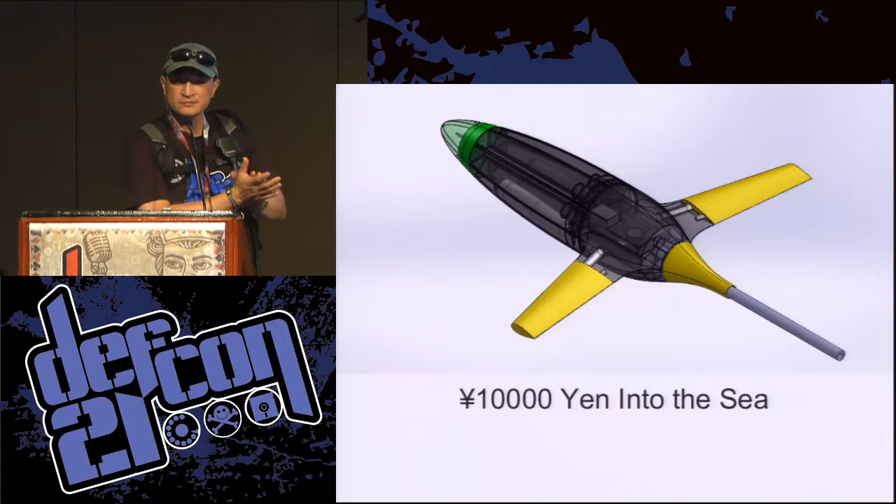Hello. So, as he said, I'm Flipper. This is my talk, 10,000 yen into the sea. Just to start with, can I get a show of hands? Who enjoys filling up their gas tank? Yeah, I'm not a big fan of it either.

Actually, I spent 4 years commuting to and from my community college. 4 years, 2-year program. I had other things to do. So it was a 45-minute drive each way, so I pretty much ended up putting about as much money into my tank as I saved by living in my parents' basement. So all the benefits of living in my parents' basement with none of the cost savings. So that was kind of an interesting experience.

And the reason why this is relevant is shortly after college, I saw underwater gliders, and they kind of blew me away because when you see the typical range and duration of these things' missions, it's pretty incredible. Around 3,000 kilometers on a single battery pack charge.

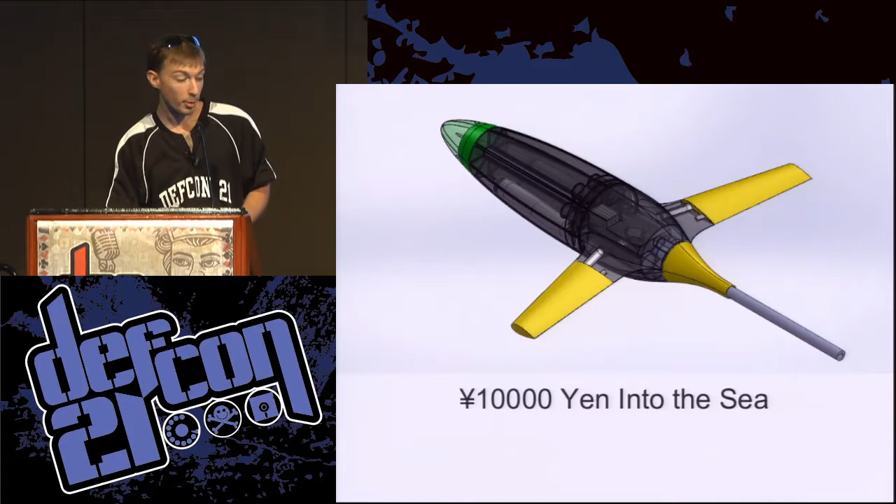And I work with electric vehicles professionally, partially as a consequence of this project. And I got to say, if you can show me a Nissan Leaf that can go 3,000 kilometers, I'll be pretty impressed. One of my coworkers says it's all about the drive cycle.

So, as I said, I'm Flipper, and this is kind of what I do, electric vehicles. Professionally, they're ground vehicles here, underwater. I keep on trying to talk my boss into letting me turn one of our vehicles into a submarine, but so far, no such luck.

So, I'm finished with my education and not much in the way of job options at the time, kind of dead-end jobs, and I'm killing time in the bathroom because I didn't really like my job. Reading the Oregonian, and I see an article on Oregon State University's underwater glider program. And they were talking about how they work. They show a little cutaway diagram, and I'm kind of blown away.

It's all like, wait. How much do these cost? I could do that. $100 tops. So that's where the 10,000 yen comes from, is at one point in history, that was about $100. A little bit of Jules Verne's too. So in order to build an underwater glider for $100, you kind of have to be an engineer, or hacker, one of the two. I definitely wasn't an engineer, so I guess that's why I'm here at DEFCON with you guys.

So how do you design an underwater glider? You have to learn how to design an underwater glider. So it was really the start of an education, self-taught in design and manufacture of underwater vehicles. I was studying machine tool technology at the time, manufacturing engineering type stuff, eventually got a transfer degree. And so yeah, it was a great vehicle to actually learn, and it gave a really good incentive to study STEM subject matter, and ultimately transitioned into an interest in an engineering transfer degree.

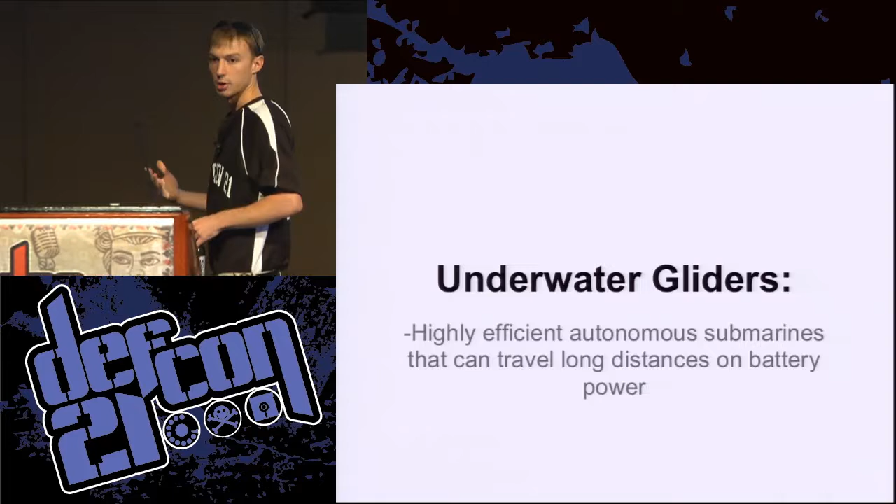And so the efficiency of the vehicle is going to be determined by a couple things. First of all, the efficiency of your fish bladder buoyancy engine. Your drag, big factor is your drag. And then also kind of related to drag is your glide ratio: how many feet forward you move through the water for every foot you lose or gain in altitude.

One interesting thing of underwater vehicles is they spend about half the time flying upside down because your gravity vector flips its head when you are going against the water column or going down with it. So, yeah, they're autonomous underwater vehicles that can travel long distances on battery power.

So history, it all started back in the 80s or something. I wasn't even born yet, so it doesn't really matter. Very egocentric view of the universe.

So they had these things called Argo floats, and they were essentially a coffee can with a big linear motor powered syringe, and they'd go down through the water column and they'd collect sensor data. And then when they had enough data, they'd float back to the surface, satellite modem, phone home, and then they'd do it all over again.

And based on my understanding of how things went down, one person was like, well, these things are really cool. We're getting really good data. We're not having to send people out in boats at $40,000 a day. But the problem is we can't actually control where they go. They're kind of like hot air balloons. So it was like, what if we strap wings on them? And underwater gliders were born.

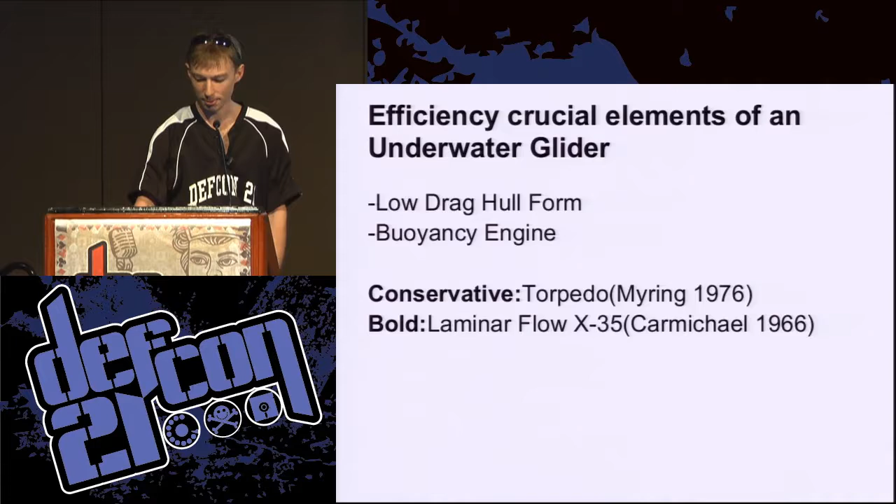So these were the design requirements I went into it with. I wanted the barriers to entry to be super low because even though I had access to a milling machine and a lathe, not everybody does. So I wanted all of you to be able to take your DEFCON CD, take the solid models that are on there, and go home and build one of these yourself.

And then range and efficiency: you're not going to take a two order of magnitude reduction in cost without taking some hits on range, efficiency, performance. So it was kind of a best effort basis. I'm pretty optimistic. I've got a fairly large battery pack compared to the current consumption I'm looking at. So we'll see.

This design actually served as a little bit of inspiration for a hack I had to make towards the end of this project. Overall, the check valves involved were kind of a prohibitive feature that just disillusioned me of this concept. So, considered a lot of things.

I struck out electric motors and linear actuators pretty early on in the process because, at the time, a lathe and milling machine were pretty much a requirement to make those happen. The weight of using an off-the-shelf linear actuator was pretty massive. You'd end up with like a scuba tank pressure housing, and that's no fun.

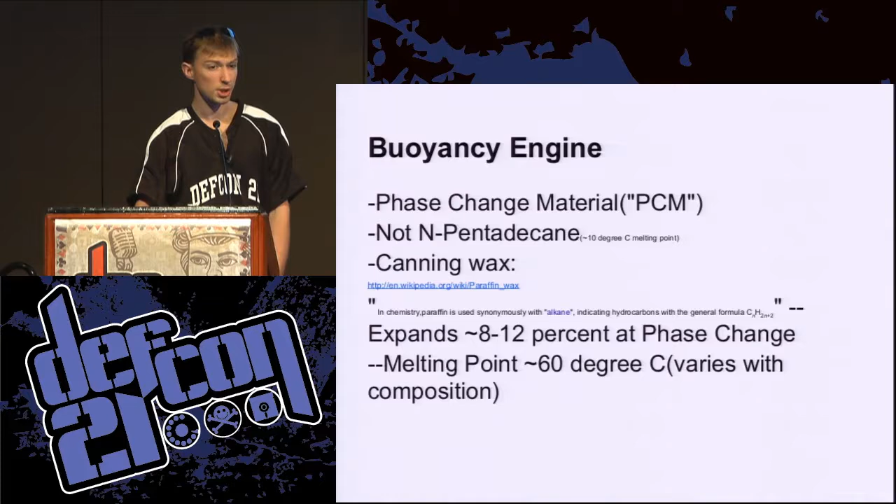So wave and solar power, interesting concepts. I'd like to explore them a little bit, especially for one concept I might mention at the end. But overall, hydraulic pumps and phase change materials kind of stood out to me as the best choices available. So paraffin wax expands 10% when it melts-ish, and it's got a very high specific heat. So when it does melt, it'll stay liquid for a very long time.

When I first started on this project, there really wasn't much available in the way of low-cost inertial navigation. You had the MultiWii project, which I thought was pretty genius. They took a Nunchuck and a Motion Plus from a Wii game console, and they actually made a 6-degree of freedom IMU out of it. Welcome to the future. This is really cool.

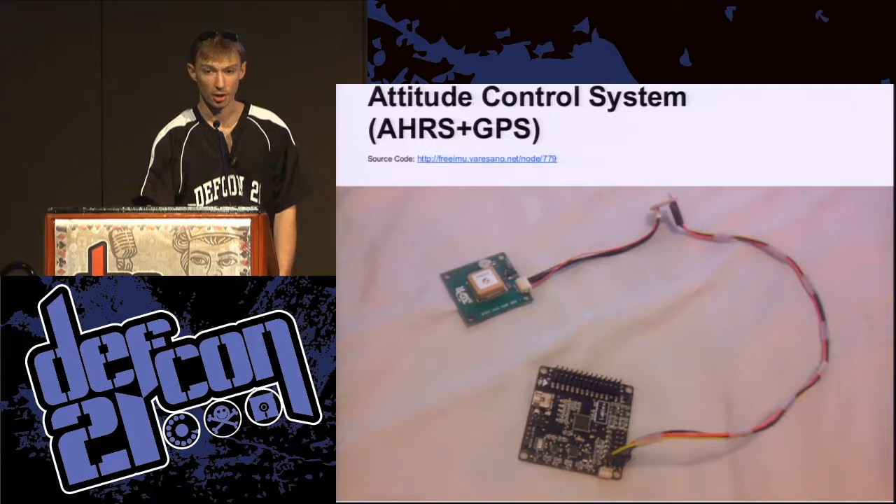Hull design was kind of fun. I spent most of the past year working on that specific aspect because it ultimately guided the production of the rest of the vehicle. Once I knew what I was packaging, I had to actually wrap it up into some sort of fluid dynamic hull form. And so based on the research, I'd heard some interesting things about 30-to-1 glide ratios with something called a McMaster's airfoil, which is pretty much a NACA 4-digit series 0030.

But based on the simulations I did using a program called Profili 2, marketed at RC plane design, its main claim to fame was it didn't stall out at high angles of attack, whereas the black line has one of the sharpest peaks on there. So NACA 0009 was kind of out of the question too. So kind of a middle of the road choice of the symmetric airfoils that were well understood at the time.

Pretty common options are NACA 0015-ish. So I think my wing root is NACA 0015 and wing tip is NACA 0012. And what that does, hopefully like the Rutan Long-EZ, if you end up stalling out, the wing root stalls before the wing tips, and that will cause the pitch to self-correct. Fingers crossed on that. Not a lot of testing in that regard.

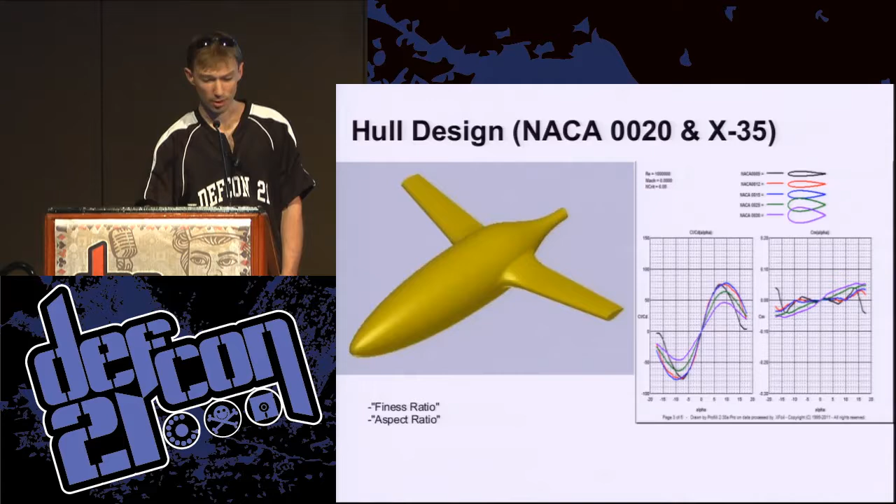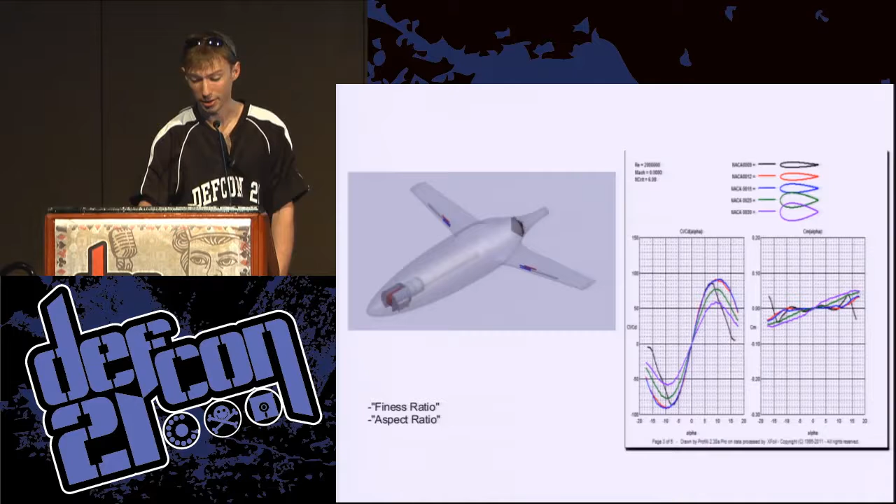So first concept, I took a polycarbonate tube and a wax motor used to control a dishwasher latch, funny enough. High force, high latency, low efficiency, unfortunately, as I found out later. And oh no, I'm not sure if I'd submitted my CFP at this point, but I was kind of sweating at that time because I'm apparently really, really bad at fiberglass.

Who knew? The original idea was that I would be using hot wire foam cutting techniques to actually generate the hull form and then lay fiberglass over it. And as you can see from this picture, that wasn't going so hot. So not as easy as it looked on YouTube. Was not going to hit my deadline at that rate.

So throw money at the problem. I've generally found that when time is of the essence, money can generally buy you time back. So I bought a 3D printer. I really am happy I made that decision. 3D printers are really cool. One of the design requirements, being able to build this thing in my underwear, check.

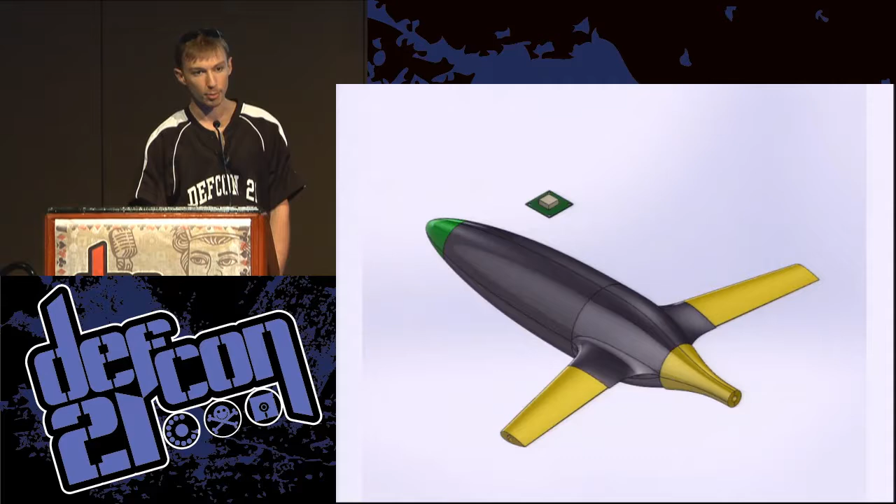So similar design, same hull form, but now broken into smaller chunks to help with the print volume, and also trying to minimize the overhang of the printed parts. Support material is an option, and one of the largest prints on there actually was using support material. But 1 month turnaround time, you really can't argue with that.

And I knew 3D printing could really help expedite the design process and getting you through multiple iterations. But until I'd experienced it firsthand, kind of saving my bacon on getting a proof of concept out the door and second, third revision, whatever, I was incredibly impressed with the value.

That 3D printer I showed was a Rostock Max. It's a Delta Bot style design, and they are one of the coolest to look at when they're running. Cartesian Bot's a little bit lame, in my opinion. And that's the robot you see in front of you.

So, $100 price target, $31 a kilogram for my plastic. That could be cheaper, but let's try and be generous just to make sure I don't underestimate. So $21 in plastic. So if you throw a significant amount of capital investment at the prospect of building injection molding tooling, then that could come down significantly. Remaining bill of material was actually published to the DVD, if I remember correctly.

And I mentioned there may have been some hiccups along the road. This bill of material is definitely not accurate to the 30-cent mark, because the phase change material concept ended up working out to not just moderately inefficient but virtually unworkable, at least with the energy storage system I selected.

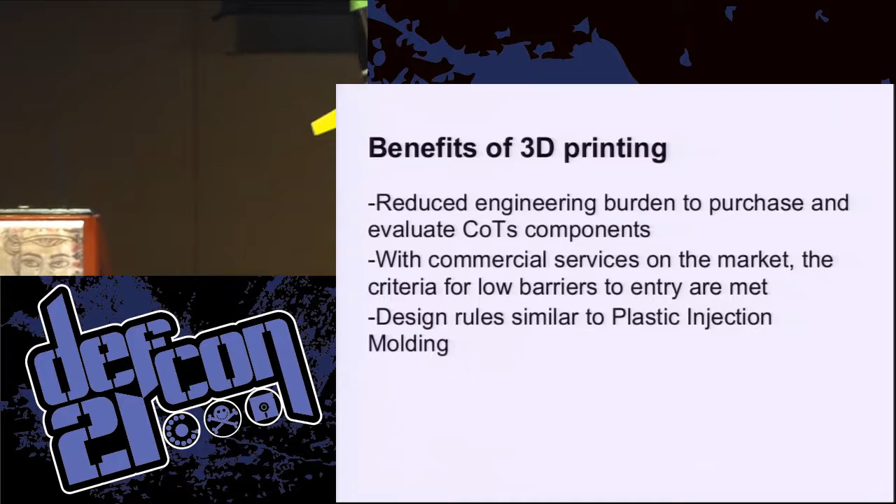So I ended up using commercial off-the-shelf McMaster-Carr parts to build the assembly, which you can see in white on the actual robot now. So the only change between what's on your DVD and what actually is here in front of you is the white assembly. Everything else I was able to recycle between designs. So modular design is a good thing, I guess.

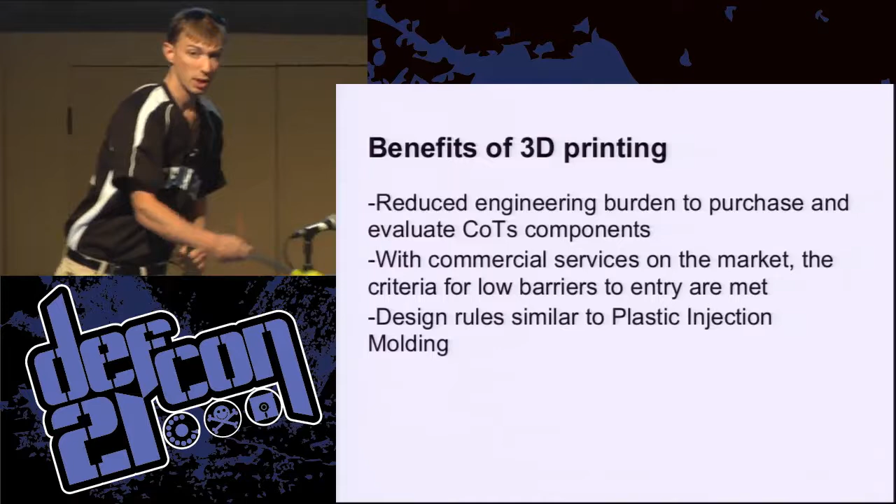Sorry about that. The gray pipe was a really good choice because it allowed for routing of the wiring, and ultimately acted as kind of a skeleton or a backbone for the entire vehicle.

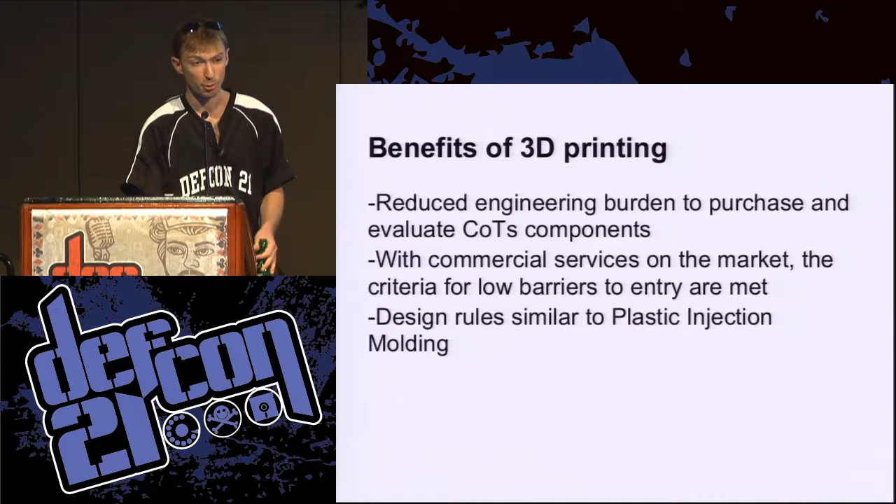What I learned from that process is 3D printing is awesome, and the great thing is when you're actually done with it, you don't have to go through an entire twisted new process to design 3D printed or injection molded parts. You're practically already there when you have a working prototype.

What did I learn through the process? I feel like I actually hit a pretty good balance between fail early, fail often, and not making stupid mistakes for lack of planning. I didn't build anything before I had complete solid model data.

And that's really valuable when you're trying to avoid these last minute crazed runs to Home Depot, West Marine, AutoZone, whatever it is. If you have a complete bill of materials before you make the first part, you know exactly what's going into the thing, and you don't find yourself running into these issues where parts are colliding with each other.

And then it was also extremely difficult to quantify whether or not a design decision was a good or a bad one, such as the wax motor, until actually trying it. So it was a design decision trade-off to not use so much simulation. And I was pretty happy with how that went, because you can simulate the daylights out of a bad idea and then find out you wasted the last year doing FEA or CFD on a broken design, and then it's all wasted. So prototypes can illuminate things that you otherwise wouldn't be aware of.

So I did this entire thing out of pocket, no grants or funding agencies, and I actually really like that, because I'm accountable to myself, and I don't have anybody breathing down my neck forcing me to chase sunk costs or make bad decisions because I need to save face over that $1,000 I wasted on wax motors. On the other hand, I gave pretty much the profit of the design away for free on the DVD this year. I've probably spent around 15 grand on the project over the past decade. And so I would consider it a dubious appropriation of my retirement savings. But that was the mission from the start.